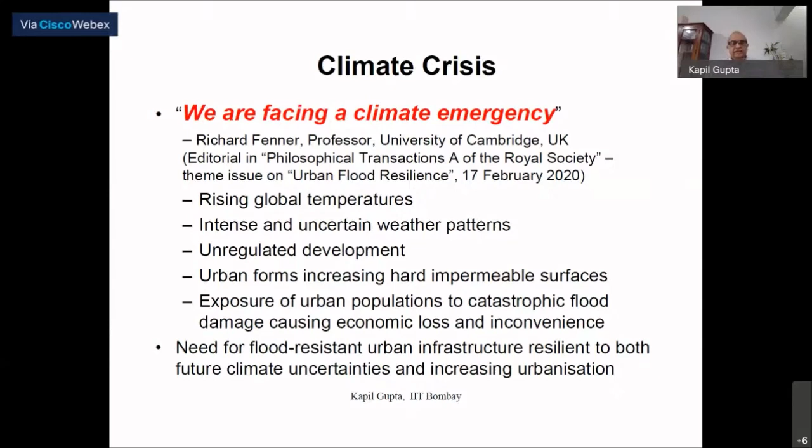As you all know, before development we had open surfaces, with nice groundwater recharge and no groundwater shortage, so there was a lot of recharge and very little overflow on the surfaces. Now with urbanization and development of houses and human habitations, we have constructed over the green recharging surfaces, so very little recharge is taking place. Instead, the overflows on the surface channels have increased, as you can see in the figure on the right.

The hydrologic response to development can be seen in the bottommost figure. Earlier, you might have a flood peak in 45 minutes of about 100 units. Now, because of increased rainfall, increased surfaces, and decreased recharge, the same flood peak is reached in 15 minutes, and the peak is also increased because everything is now flowing over the surface.

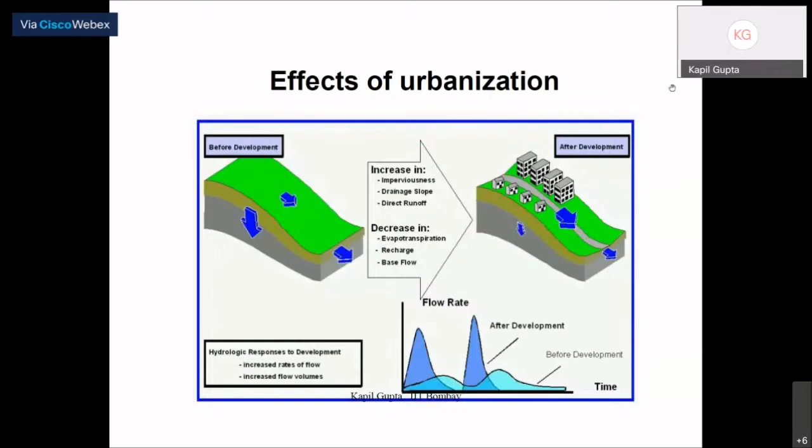Now, the past 2 years of data reveals that all state capitals have been experiencing more than 50 millimeters per day of rainfall several times in a year, and even more than 100 millimeters per hour.

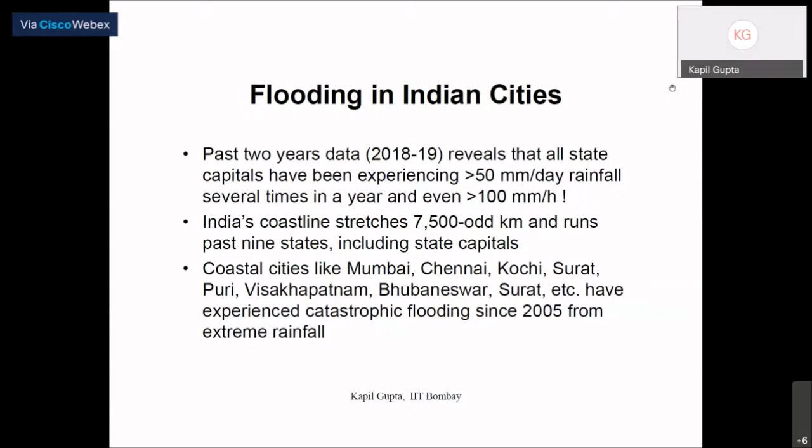Coastal cities are also vulnerable because we have a long coastline. Coastal cities like Mumbai, Chennai, Kochi, etc. have experienced catastrophic flooding since 2005 from extreme rainfall.

Now, coming to the problem and the challenges: whenever we have a drainage system, everybody says increase the size of the drainage, put an extra pipe, and all those things. But we really want to ask, can we really do this?

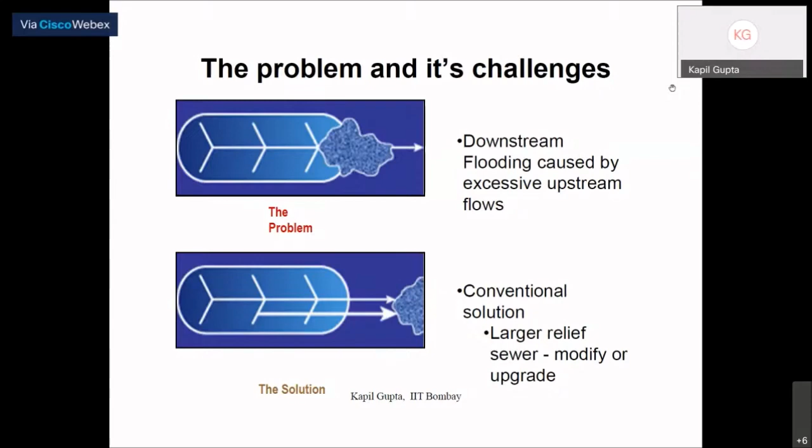Where is the space in the cities? All the houses have already been constructed. So if I want to dig up the road, it will involve disrupting the traffic, relaying the telephone pipelines, relaying the water supply pipelines, and so on. This is very costly and very disruptive, and until it is completed, the problem will not be solved.

We did such a project in Grant Road about 10 years back. It was just a 100-meter stretch, and even in that, it took 6 months just to relocate the water supply pipeline. So these are the issues.

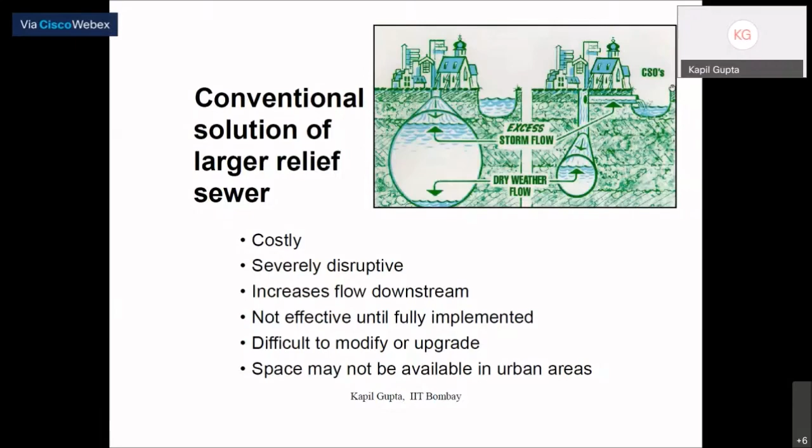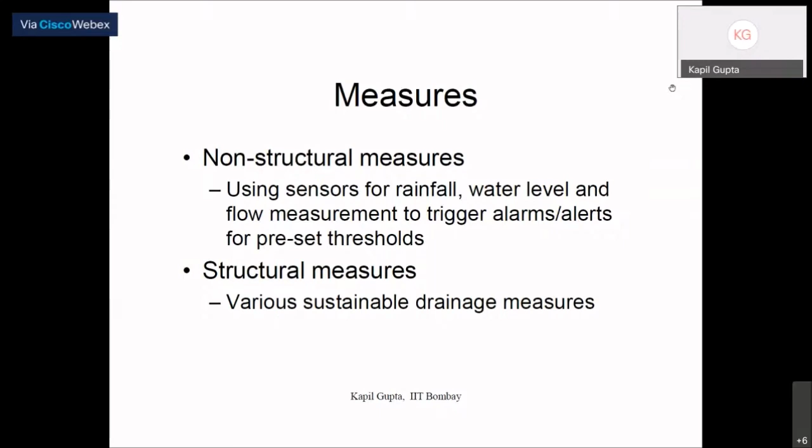After the 2005 floods, at that time the IMD was not as modern as it is today. They had only two manually recording weather stations, which could record rainfall at 8:30 and 5:30 in the evening. When it was raining continuously, they had no idea how much it was raining and where the flooding was happening. So after the 2005 floods, we installed 60 automatic weather stations for the Municipal Corporation of Bombay, and they were immediately functioning from June 2006.

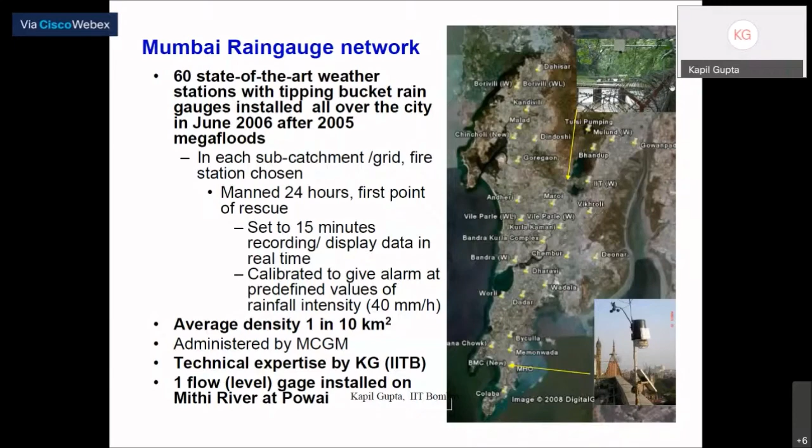These automatic weather stations can record rainfall at every minute interval, but we set them to record at 15-minute intervals. We installed them in each subcatchment, forming a grid. These are manned 24 hours, on top of fire stations and all the BMC offices. We also installed an ultrasonic flow gauge on the Mithi River at that time.

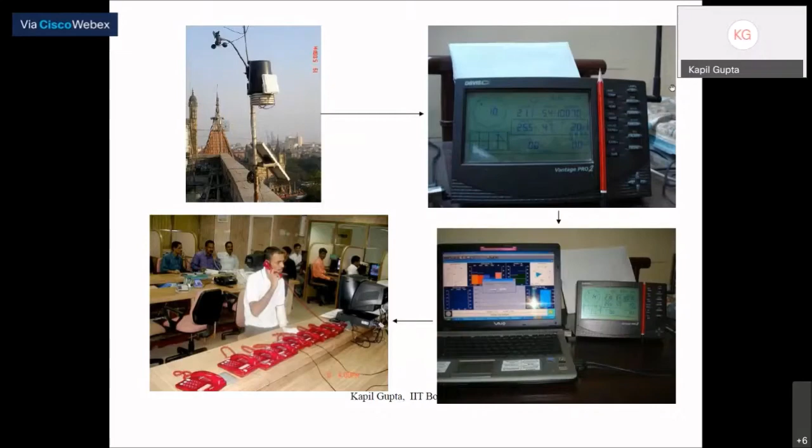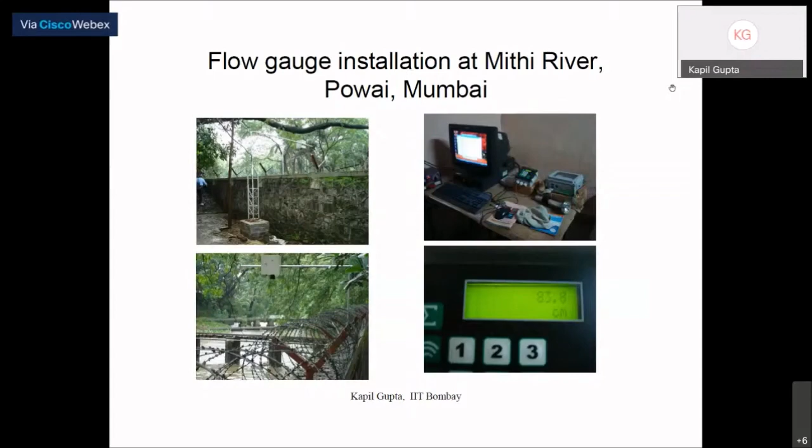Now this figure shows the automatic weather stations. These have all been connected through internet, and there's also an MCGM app available. So anybody who has the app can download this and see the rainfall happening.

In the past 24 hours, as you can see in this figure taken early in the morning, but the latest figure on my mobile tells me that in the past 24 hours we have had almost 300 millimeters of rainfall, and in 12 hours, 206 millimeters. So we are having more rainfall in less time, and this lends support to what the earlier speaker said, that we are going to see more and more rainfall in less amounts of time. So we have to prepare for this.

A similar system was proposed for Guwahati, and it is in progress. They are having 18 automatic weather stations in the pipeline, and other cities should also take similar measures so that they can at least have information on where there is heavy rainfall.

There is wide variability of rainfall. In South Mumbai, the average rainfall is around 1800 millimeters per year, and in North Mumbai it is around 2500 millimeters per year. This variability is also seen in the daily rainfall with variations.

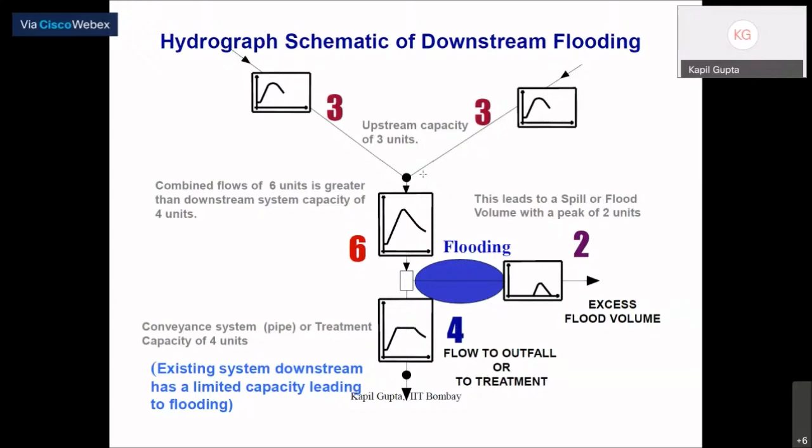So we do what is known as attenuation. Those who have done electrical engineering will understand the term, or simply, providing storage in common language. If I store 1 unit before the 6 unit pipe, making sure only 4 units go downstream, then there will be no flooding in the affected area.

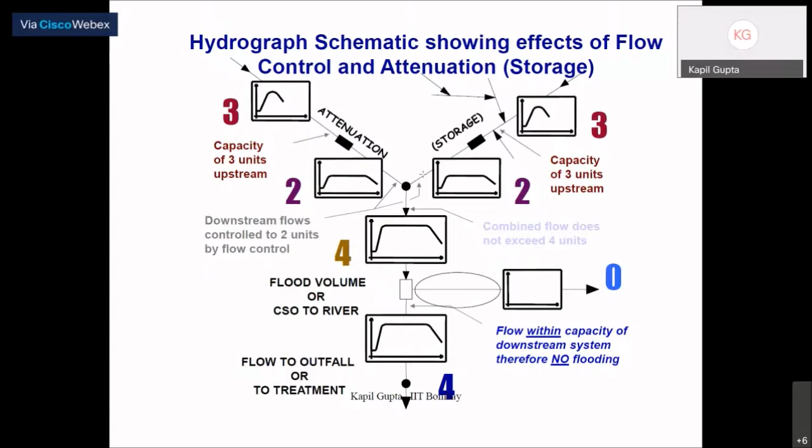So let us see what storage techniques are available to us. These are known by different names in different countries. In Europe, they are known as sustainable urban drainage systems. In the USA, they are known as best management practices. In Australia, they are known as water sensitive urban design. In India, they are known by a much simpler term—we simply call it Jugaad.

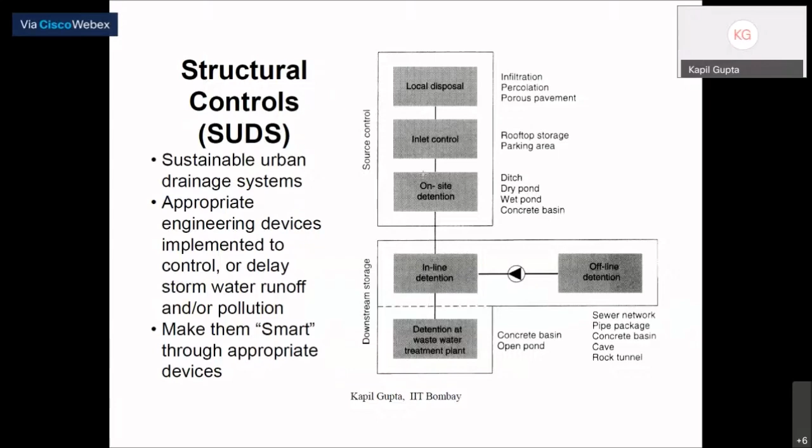The techniques include infiltration, percolation, porous pavements, rooftop storage, parking area storage, storage in ditches, dry ponds, wet ponds, inline detention storage, and underground concrete basins. Let us have a look at each of them one by one.

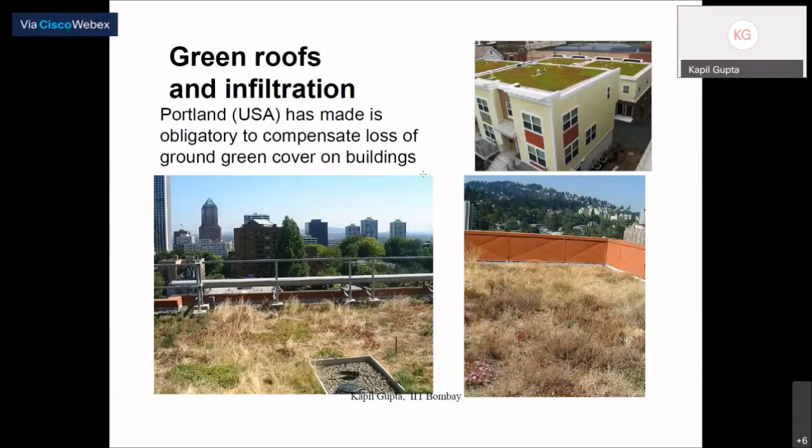So as far as rainwater is concerned, it still has the same amount of recharge available as before the building, and that is one of the ways we can reduce the discharge. Once you have the green area on the roof, you can lead the water through pipes, take it downstream, and provide an infiltration pit all around the building. There are various configurations of infiltration pits—if you type 'infiltration trench' into Google, you will get more than a million pictures, and you can choose whichever is most appropriate to your town, city, or village.

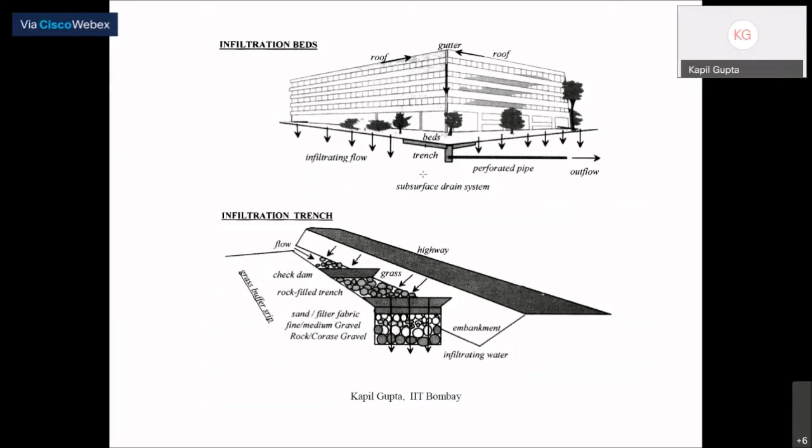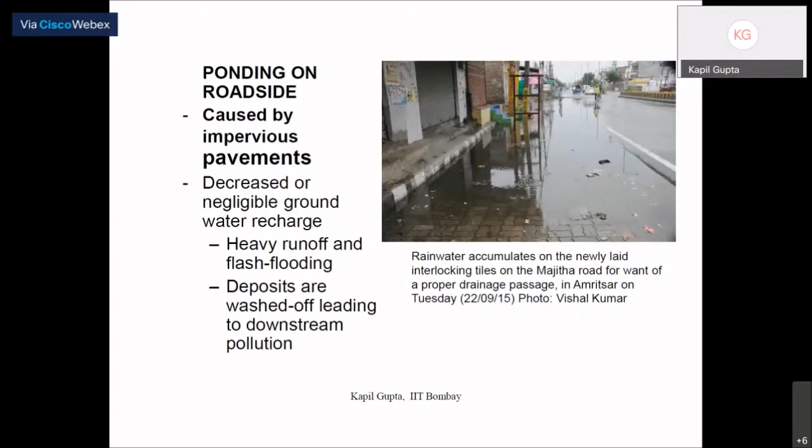There is no groundwater recharge, there is heavy flooding, and a lot of muck to clean up after the rainfall is over. So the alternative is simple: provide porous pavements. Why do we have to have solid pavements? Make the pavements have some porosity.

Porous pavement, as defined by ASTM, is one with porosity and permeability high enough to allow water to readily pass and significantly influence hydrology, rooting habitat, and other positive environmental effects.

There are two basic designs. One is asphalt or concrete pavement lacking finer aggregate. So we are authorizing the contractors not to put extra material; instead, they can put less material. I don't mind paying them the same price as long as it does not cause flooding.

Then the other ones are open cell cement blocks, and they are designed to provide a void content of 15 to 25%. So let us see how they can be laid out.

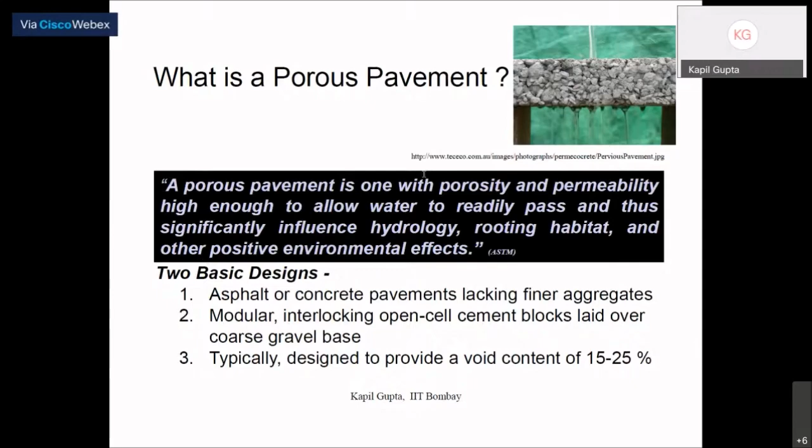On the left, you can see these hollow paver blocks in which vegetation can also grow. So this serves both as a support for parking your cars as well as green areas for providing vegetation, and it looks very pleasing and aesthetic, and it reduces the problem of flooding, enables groundwater recharge, and so on.

On the right hand side, we see that the trees provide permeable rings around them instead of totally concreting them right up to the neck and suffocating the trees. So these simple measures will be very effective. Even if you put 20% of this, it will reduce 80% of the flooding in the critical areas.

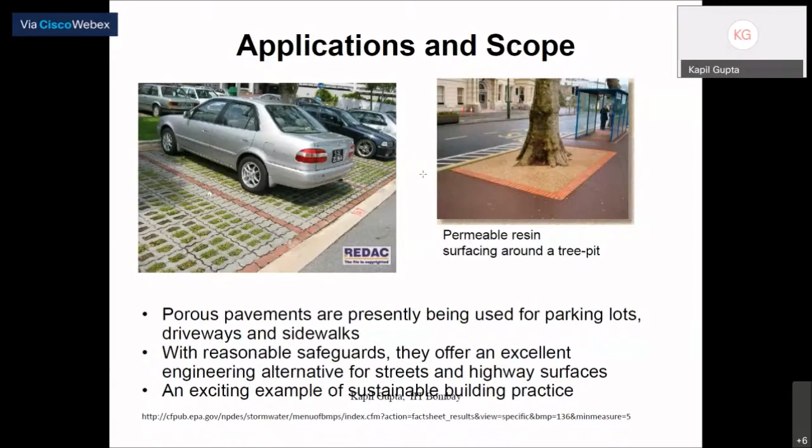Then the next is source control, rainwater harvesting. Now a common misconception amongst the public is that rainwater harvesting means groundwater recharge. They think that if I simply put a pipe from the roof and lead it to the ground, that is rainwater harvesting. But those of you who are engineers will know that in some areas we have sandy soil, other areas we have hard rock.

One other thing to notice is that the rate of rainfall is in millimeters per hour, whereas the rate of recharge is in millimeters per year. So how can the water recharge unless you provide a storage? That is what the huge reservoirs, ponds, and talabs in the villages do — you store the water during heavy rainfall, and gradually over months, it recharges the groundwater.

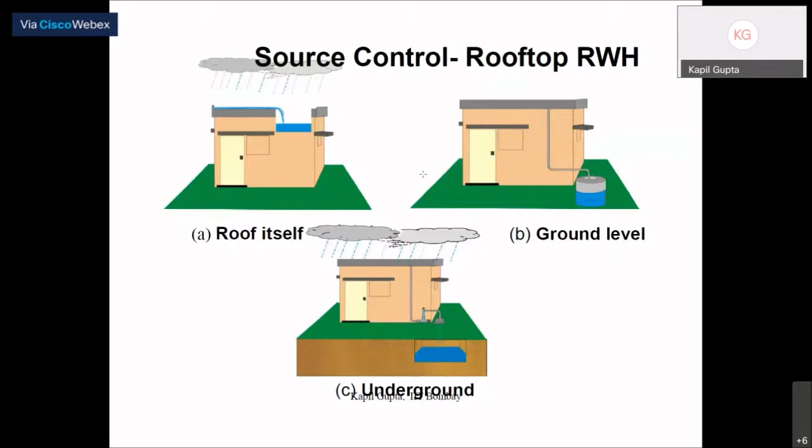Now, one of the professors in the UK at Imperial College actually constructed these rooftop rainwater tanks of different sizes. So if we consider the Indian context, you have a 100-liter Syntex tank, 200-liter, 500-liter, and 1000-liter tanks. He installed these in one of the localities and measured the inflows, outflows, rainfall, etc.

He found that a 100-liter tank could reduce the overflow by 11%, and a 1000-liter tank could reduce the overflow by 43%. So theoretically, if everybody puts a 1000-liter tank on their premises, it will reduce the flooding by 40%. So instead of 4 feet of water, I will have only 2 feet of water, which is much more manageable.

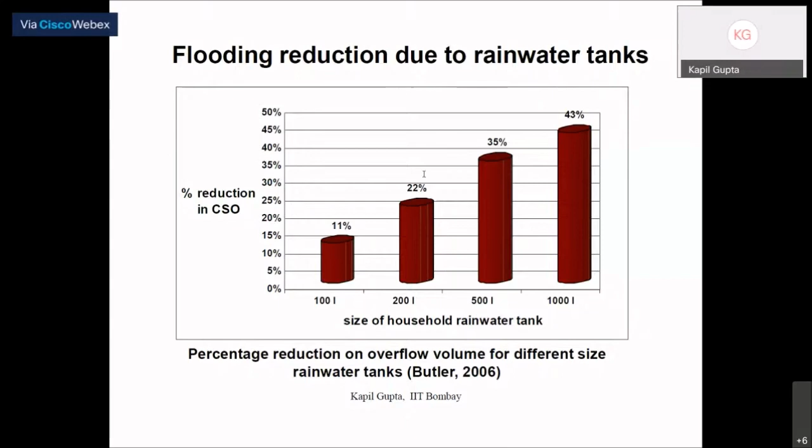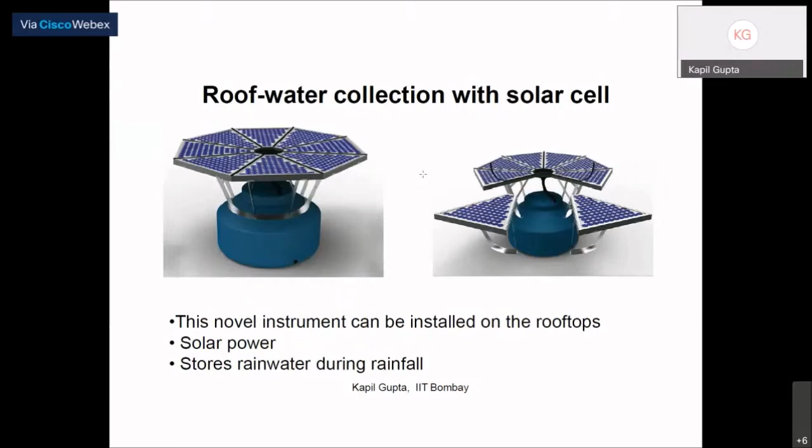Then one can modify the system. You can have both solar harvesting as well as panels that lead the water into the tank. And one should assume that this is not for potable water — other than drinking, it can be used for all other purposes. Even if you want to drink it, if you boil it for 20 minutes and allow it to cool, most of the bacteria are killed in extreme cases.

So these are two examples. One is near Nashik in Maharashtra — a simple arrangement with pipes leading from the roof into the tank and the bottom pipe going into the taps of this public toilet on the way from Mumbai to Nashik. On the right, you see a similar arrangement on the other side of the world in Brazil, almost identical. People have the ability to think and implement what they think. Simple techniques, simple methods, but if implemented, they will go a long way in reducing flooding in urban areas.

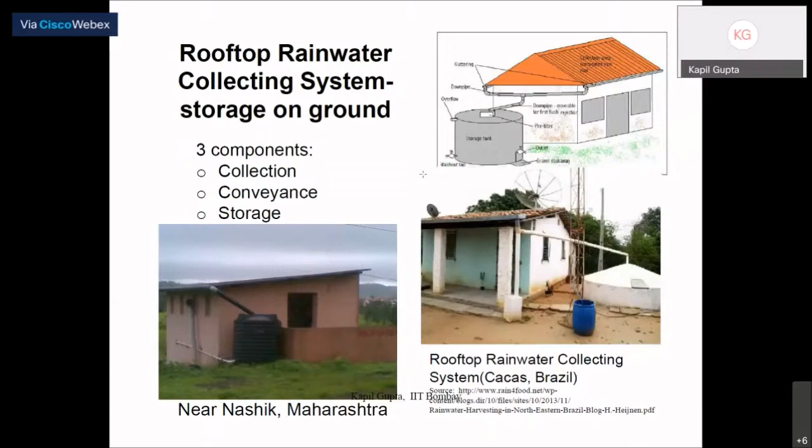Then detention ponds, or holding ponds as they are known locally, also provide a good option. Strictly, the difference is that detention ponds are dry between events, retention ponds have some water always, and wetlands have some plants in them.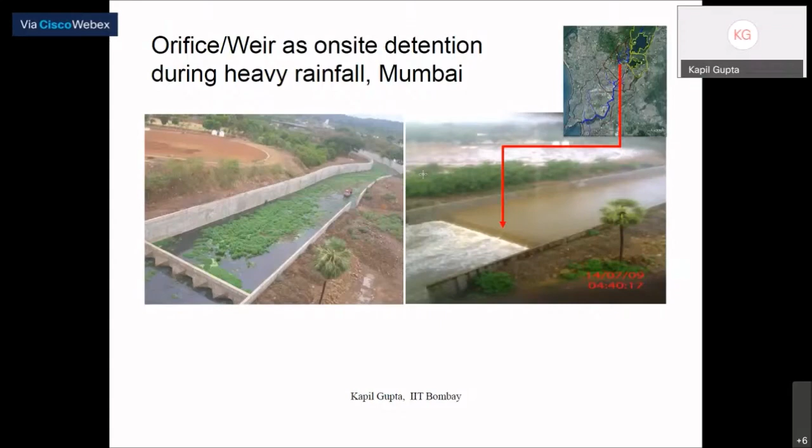If this weir had not been there, all that 3000 cubic meters would have reached the downstream area immediately, thereby causing flooding. But now we are storing this, and it is released gradually. So if you go back to the first figure, we are actually storing that extra 1 unit here and releasing it slowly so that there is no flooding downstream. So I am happy to let you know that after the construction of these walls and provision of these weirs, there has been no flooding within the 9-kilometer stretch of the Mithi River in Mumbai. Other areas get flooded, but that is because the measures have not been completed in those areas.

So this is the second holding pond which was constructed upstream. As you can see, the principle is the same. During normal times, it just allows water to pass through, it is dry, and during heavy rainfall, water ponds up behind the weir or the walls that have been constructed.

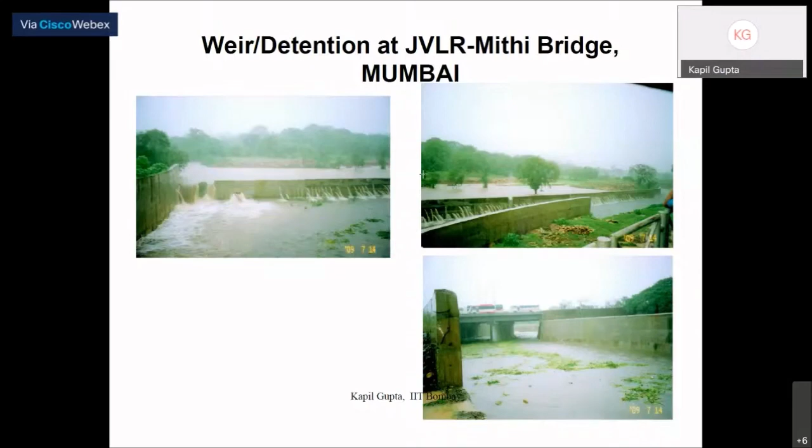Such underground tanks have been installed in many cities now. I visited the one in Barcelona in Spain. There they have got around 11 underground holding ponds, each the size of a football field. They were built for the Olympics at that time, and they have significantly reduced the flooding in the low-lying areas.

And another advantage is that, if I want to increase the size of the drains and replace the existing drains for, say, 7 kilometers, as happened in Hong Kong, it would take 10 years to complete. And this time is not available to us, nor is the space available. So the only option is to construct huge underground holding ponds in suitable locations by proper planning, and make sure that the necessary slope and storage is available. And this is the way forward for highly jam-packed cities like Bombay and Delhi.

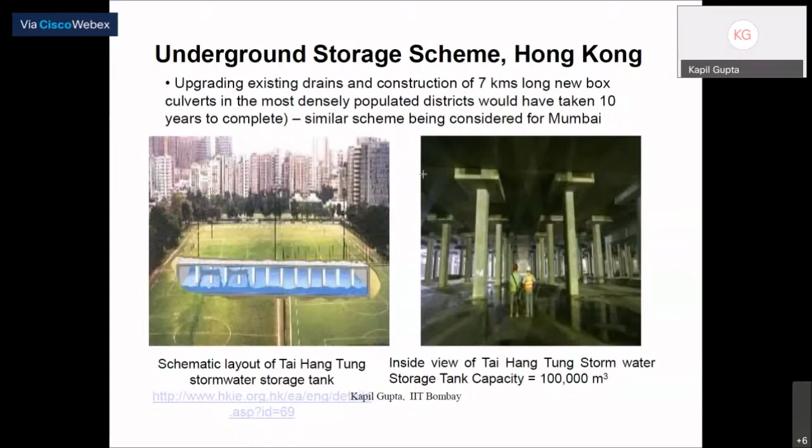So the future roadmap: we should use the catchment as the unit of planning. All the people who have studied hydrology know that water is planned using catchments and not political boundaries, ward boundaries, or city boundaries. And these sustainable urban drainage practices, best management practices, or SUDs should be part of the master plan. We need to identify locations for source control, on-site detention, inline detention. We have to identify suitable low-lying areas, river floodplains to be used as parks and holding ponds, and we have to improve the drainage features of existing drains.

In this direction, we have also done some work, and I was involved in writing the chapters on these for the NDMA Urban Flood Disaster Management Guidelines, which are available on the NDMA website. And last year, the Ministry of Housing and Urban Affairs, through the CPHEEO, released the first storm drainage manual for design of storm drainage systems in August 2019, and it can be downloaded from the CPHEEO website.

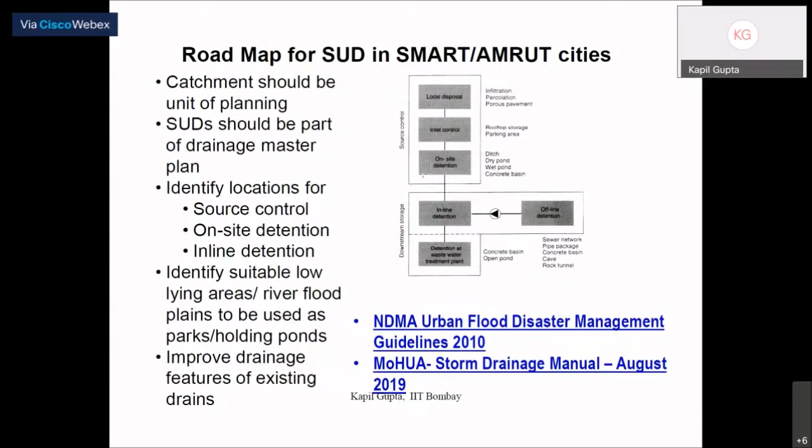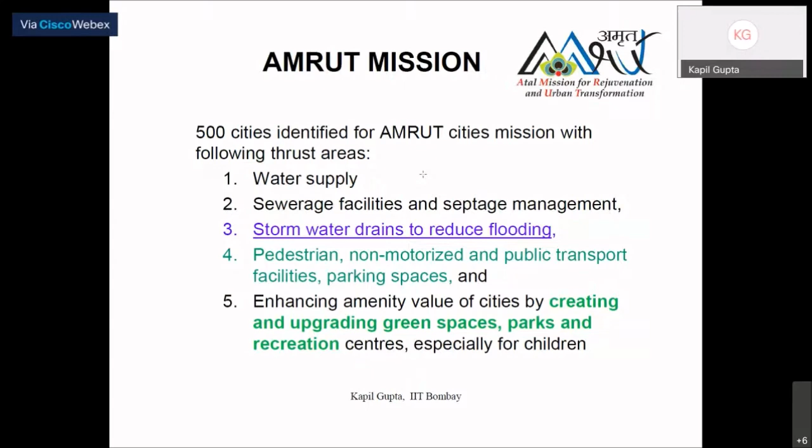You all must be aware of the AMRUT mission, where they have identified 500 cities. And if you look at the thrust areas, 4 out of the 5 thrust areas pertain to water: water supply, sewerage, stormwater drains to reduce flooding, and enhancing amenity values of cities by creating and upgrading green spaces, parks, and recreation. So item 3 and item 5 can be addressed by what we have covered in this presentation. And even if one of the participants implements it, I will be very happy that my presentation has been found useful.